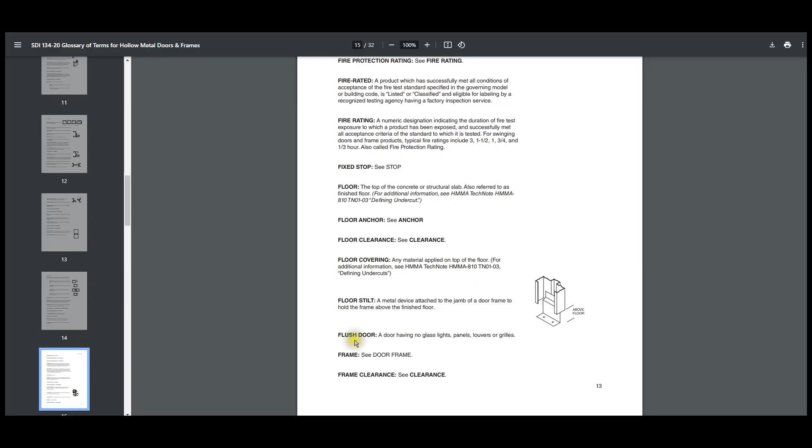Okay, here we are on the page: floor, the top of the concrete or structural slab. Most certainly SDI is talking about these terms from the perspective of the steel door industry. Also referred to as finished floor, subfloor, finished floor, floor. I don't know, seems like we got to talk more about it. Let's copy this, defining undercuts. Here's our document.

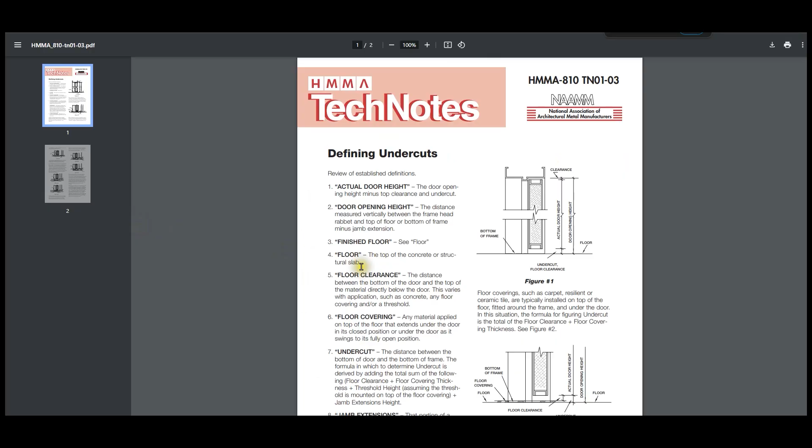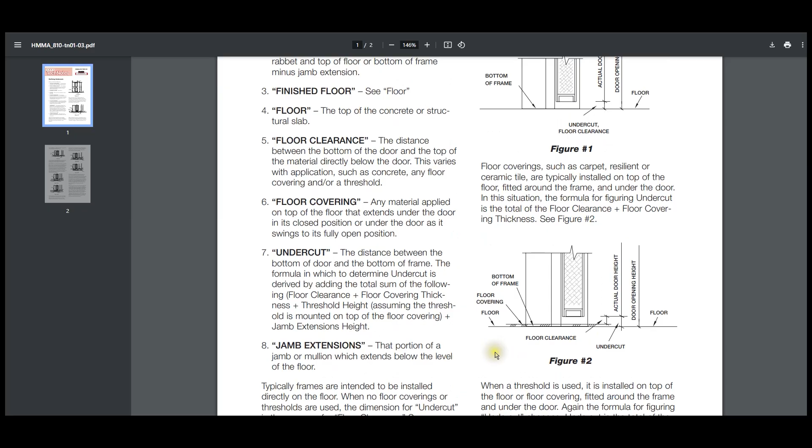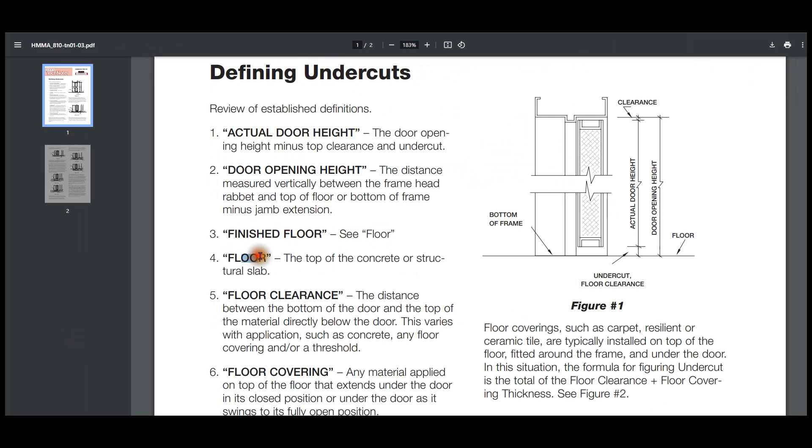So they're saying that floor, also referred to as finished floor. That's telling me that you're using floor and finished floor interchangeably, which, no. HMMA's saying finished floor, see floor, floor, the top of the concrete or structural slab. I don't know about that.

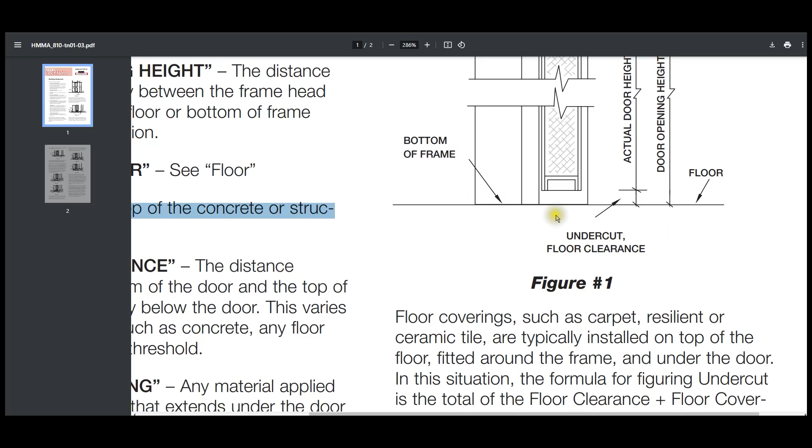So when I look at floor, the bottom of the frame they're showing is sitting on the floor. Okay, that's probably going to make a lot of sense. You're doing a typical run-of-the-mill tenant build-out space, and you've got a men's and women's restroom in your local pervasive coffee shop. Yeah, that knockdown is going to sit on top of the tile floor.

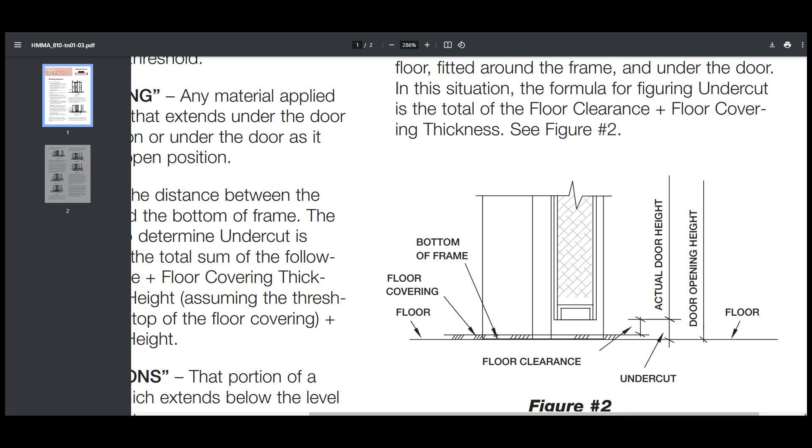However, you've got floor, then you've got floor covering, and then you've got floor. Floor covering at the bottom of the frame. So have you set the frame onto the floor and then brought floor covering around, like carpet, hardwood, tile, or epoxy, and then coped around the bottom of the frame? Maybe. The point of all this is it needs to be thoroughly talked through so you know where you're placing your frame and what is the floor.

So, don't quote me because this is just my experience, but when I think of floor, I'm going to have subfloor and then finished floor. And I'm going to say, where are you putting your frame? On the subfloor or on the finished floor? Because I don't know anybody that uses the term floor covering.

It's the floor. Then if they say, well, the concrete's poured, all the hardwood's going in next, and then I'm going to put the doors and frames in last, well, they're probably going to bring that hardwood all the way up to the studs, and then your frame's going to sit on top of the hardwood. And then you've got to say to yourself, well, that's okay. Here's a real scenario, an actual job.

In the early 2000s, this fella on the south side of Chicago started building grocery stores, and he just grew gangbusters. What he was doing was: concrete slab, the hollow metal frames would go in, then they were pouring epoxy over the floor where they were doing some sort of food handling. So then the question becomes, okay, our frame is sitting on the subfloor, our floor covering is going to represent the finished floor. What does that do in terms of your clearance dimension from the bottom of the door to the top of your finished floor?

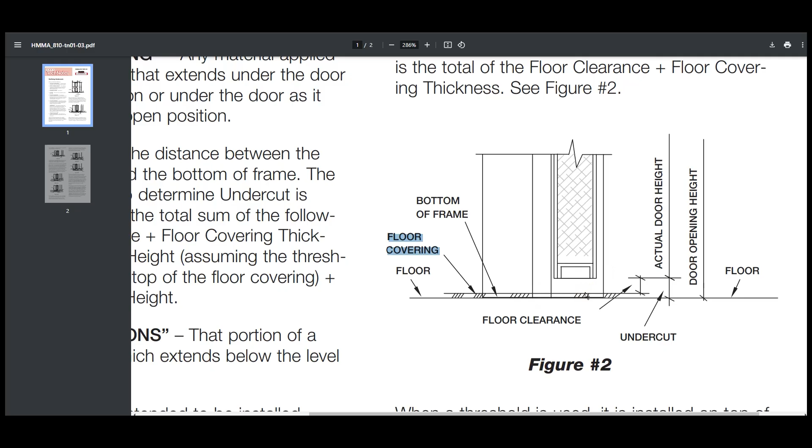Undercut is the dimension from the bottom of the door to the bottom of the jamb. So you've got to think about, well, if that's standard 3/4 inch and they're going to pour a 1/4 inch, you're going to want to say, well, is a 1/2 inch adequate for what you're doing in terms of clearance? Is the floor level? Will you have any problem with a 1/2 inch because it's smaller than standard?

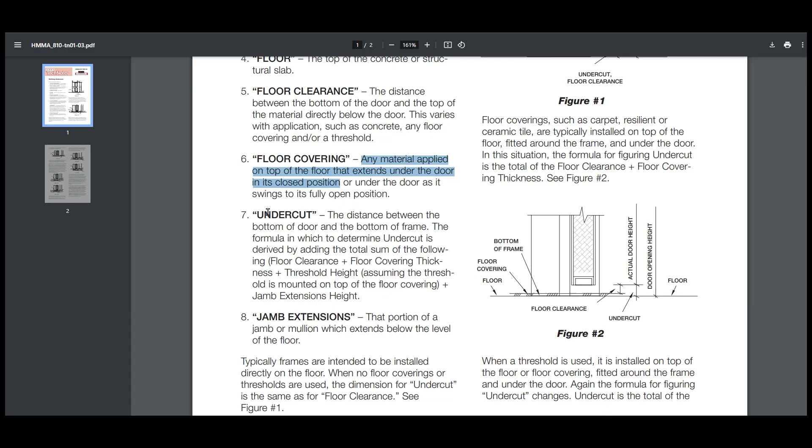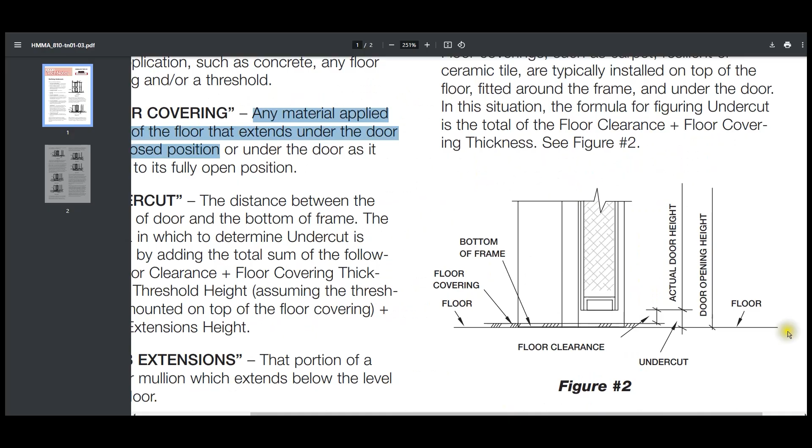Floor covering: any material applied on top of the floor that extends under the door in its closed position, or under the door as it swings to its fully open position. Okay, so a floor covering could be a mat that you wipe your shoes on before you walk in. So obviously the definitions given by the governing agencies are what's to be followed, but in real world experience, for me, it deserves more conversation to determine what exactly is happening. It's hard to take 3/8 of an inch off the bottom of a door. It's even worse to try to take 1/2 inch off the bottom of a door.

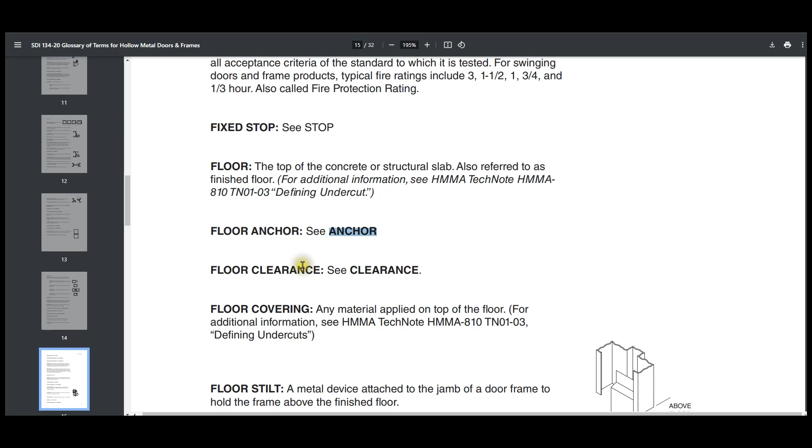Okay, the next definition, floor anchor, is see anchor. I'm sure I've discussed that quite at length, but let's move on to it.